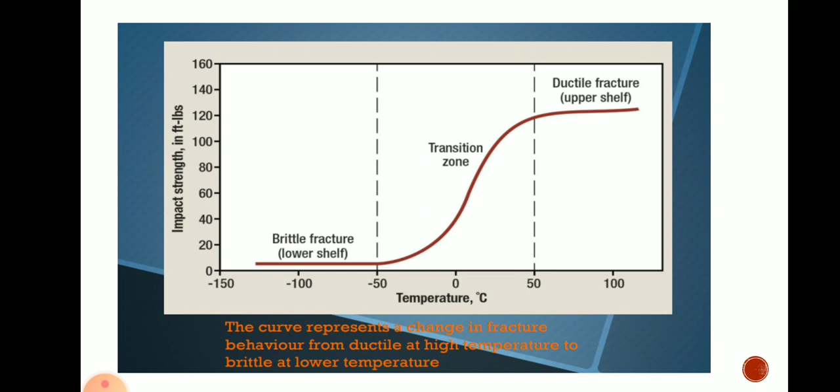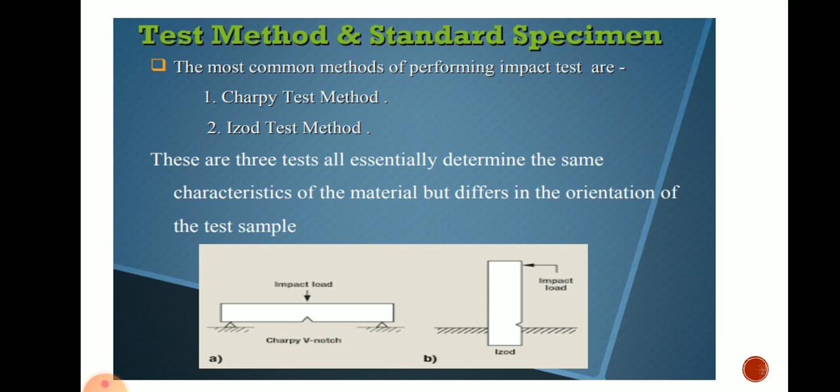In first destructive testing we have seen tensile testing of the metals. Secondly, we have started this impact testing of the metals. So in impact testing we have seen why the impact test is necessary, what are the types of material that can be tested by impact test, and what is the procedure to carry out this impact test. Then we have seen two types of impact test are there, Charpy test and Izod test.

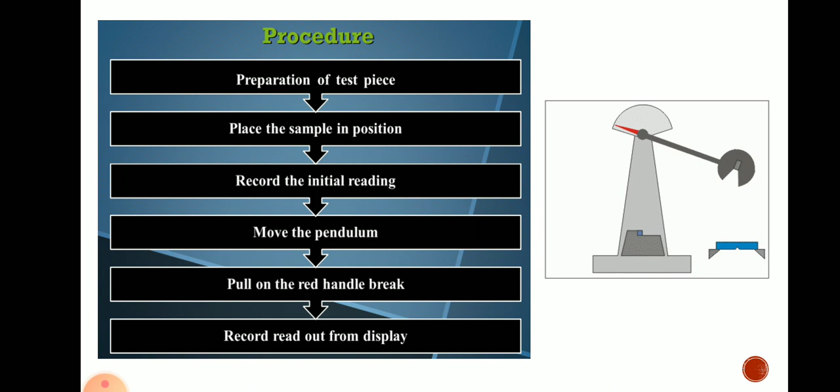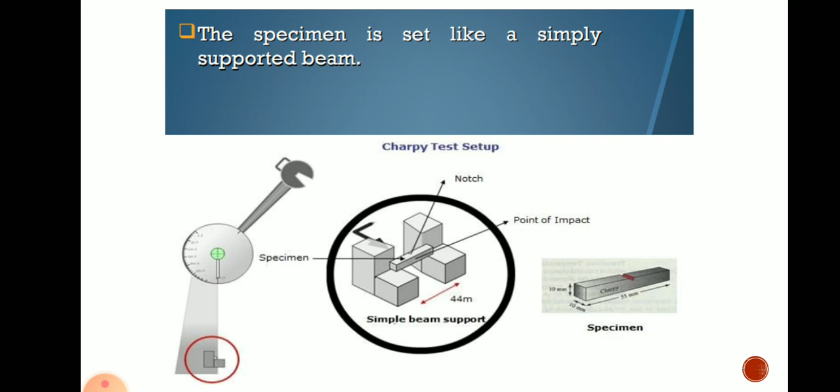Charpy test we have seen in detail, what kind of specimen is required and how that specimen is placed, like a simply supported beam, and a V notch is there, and the V notch is exactly in the opposite direction of the hammer hit. So that we have seen, and we have also seen how to calculate the impact energy and toughness of the material by using this Charpy test.

Second test now we will see in this video, that is the Izod test. Previously we have seen Charpy V notch test. Secondly we will see now here Izod test. So this is also a similar kind of test. With this test also we are going to find out the impact energy as well as the toughness of the material. So Izod impact is defined as the kinetic energy needed to initiate the fracture and continue the fracture until

the specimen is broken. This test can be used as a quick and easy quality control check to determine if a material meets the specific impact properties or to compare the material for the general toughness. So this test also will give you the same two things, that is the toughness as well as the impact energy.

In this also the equipment used is a similar kind of equipment, but just a small difference is there. Here the test specimen is not a simply supported beam. Here the test specimen will be placed exactly vertically, and the procedure will be again a similar procedure. Just here you have to place that test specimen exactly vertical, you have to prepare the test specimen, and here the test specimen is having a certain standard size.

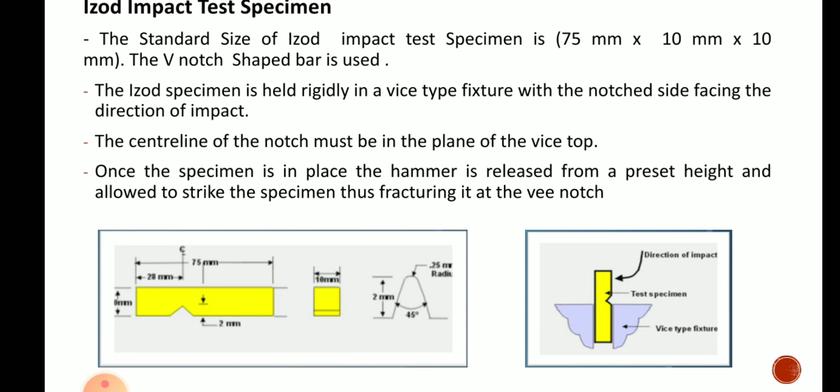The center line of this notch must be in the plane of the vice top. So in that second diagram you can observe the center line of that notch is exactly matching the plane of the vice top. Once that specimen is placed in, the hammer is released from the preset height, that is initial height capital H, and allowed to strike the specimen and thus fracture it at the V notch.

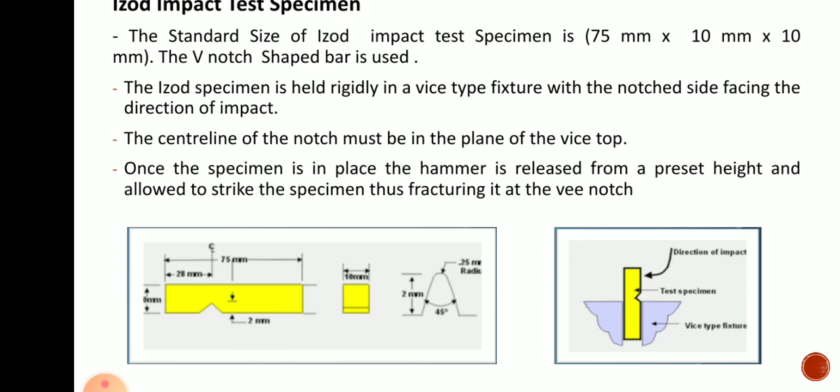So here also that V notch is prepared with the 45-degree angle and 0.25 mm base radius, but just here the difference is the V notch is not exactly at the center, it is above a certain height from the center and is placed in the vice such that the V notch plane will be exactly parallel to the plane of the vice top. And test specimen size here is also different, 75 mm length, 10 mm by 10 mm cross section.

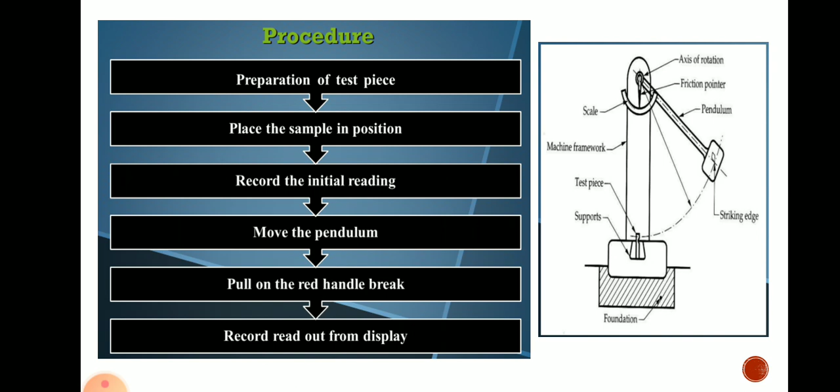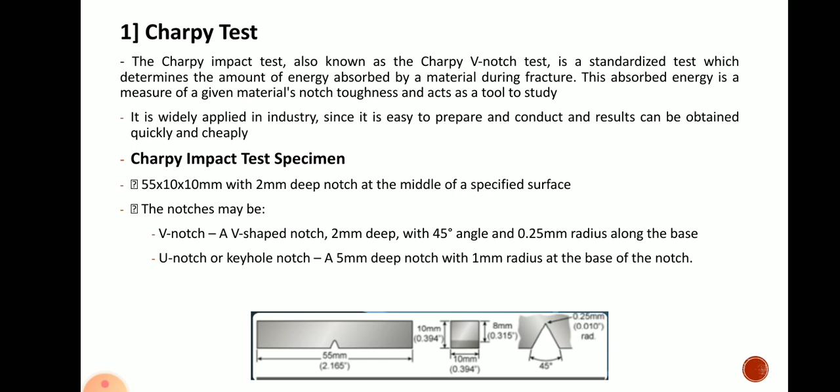In the last Charpy test, we have seen the standard test specimen size as 55 mm length, 10 mm by 10 mm cross section, 2 mm deep V notch, 45-degree angle of that V notch and 0.25 mm radius at the base. So here also in Izod test, the V notch is a similar kind of V notch with similar dimensions, that is 2 mm deep, 45-degree angle and 0.25 mm base radius. But the length of specimen here is 75 mm instead of 55 mm. Just this is the difference, and the position of that specimen is vertical here.

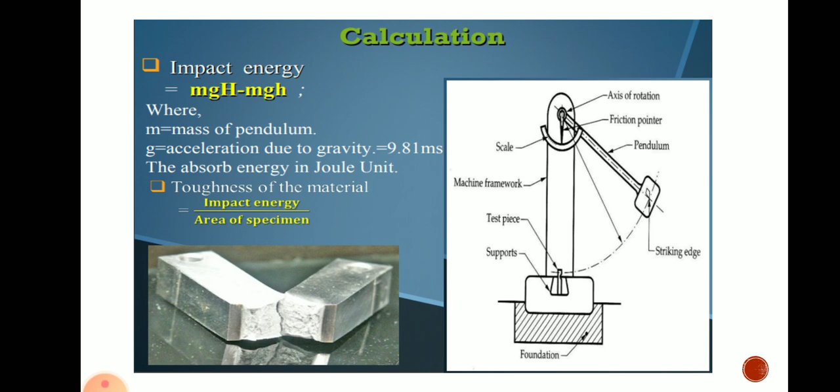So here also we are finding the impact energy by the same formula. Initial energy we can find out as mgH minus final energy. The difference between initial and final energy will give you the impact energy, and toughness you can find out by one simple formula, impact energy divided by area of the specimen. So by this we can calculate the impact energy and toughness in case of the Izod test. So this is regarding the Izod test.

In the next lecture we will find out the difference between this Charpy and Izod test.